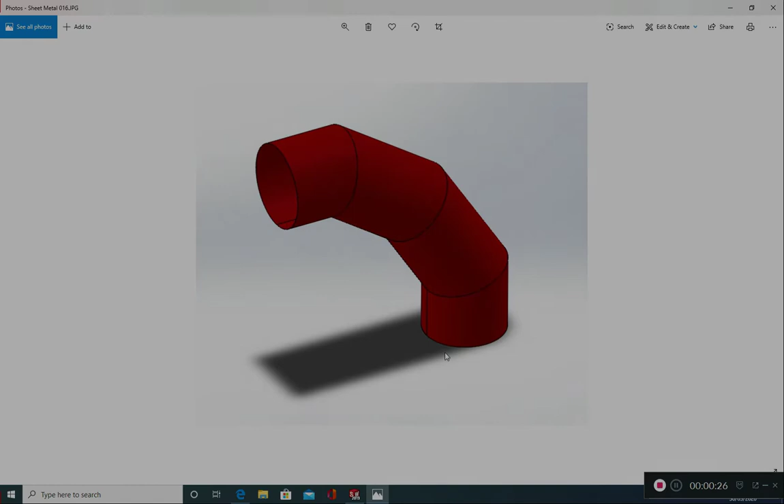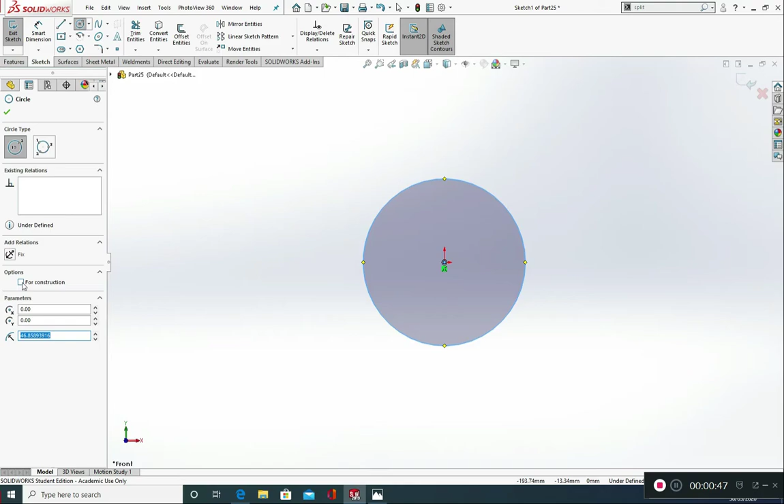So I've flipped into SolidWorks here. I'm going to go to File and New, and I'm going to create a new part. I'm going to go into my front plane, Normal To, and I'm going to produce a circular sketch from the origin point, and I want to make this for construction. I'm going to get a line now. I'm going to draw a line from my top quadrant to my origin, and then across to this quadrant over here. Press the Escape key.

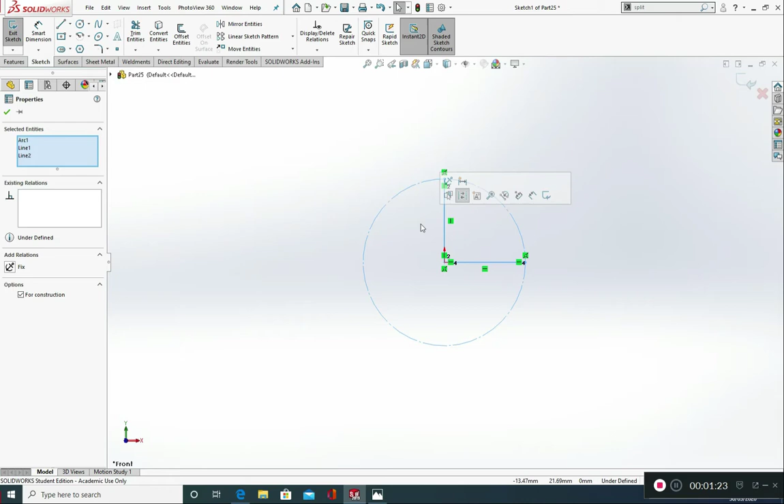Select both of these lines. You can hold down Control and left click on each. The other way of doing that is the two selection boxes. You've got a blue selection box and a green selection box. The blue selection box will select anything that is entirely inside it. The green selection box will select anything that is touching it. So I just want these two lines to be selected, so my green box can go like this.

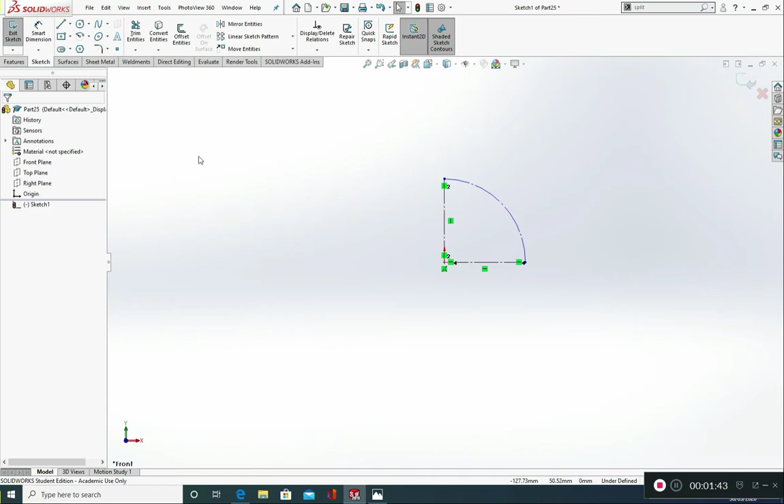I'm going to make these two lines for construction and green tick. I'm going to go to Trim Entities, Power Trim, and just trim that away. Green tick. I'm going to go to Smart Dimension and give this a value of 1000 millimeters, and this will also be 1000.

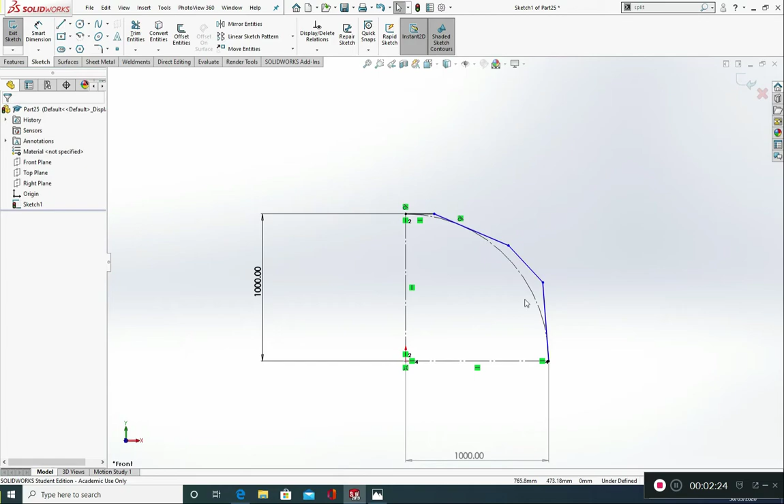I'm now going to go up to Line and I'm going to draw in my profile for my 4-part elbow bend. So this is going to be the path that the profile will take. So 1, 2, 3, 4. Okay, I want to make this line here vertical.

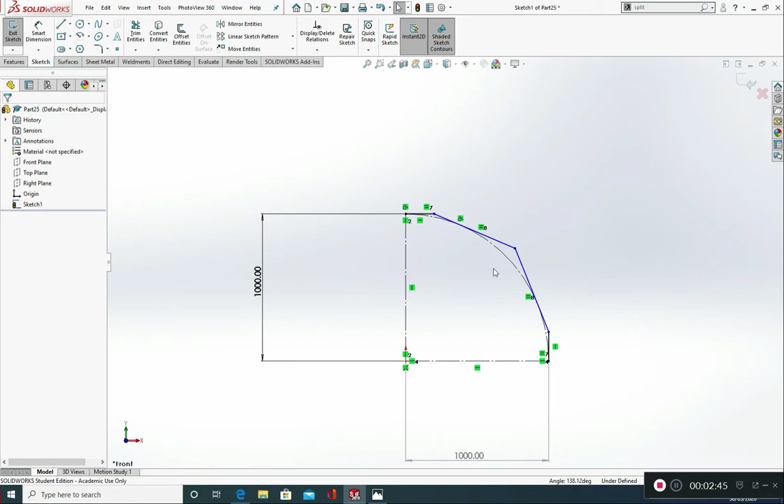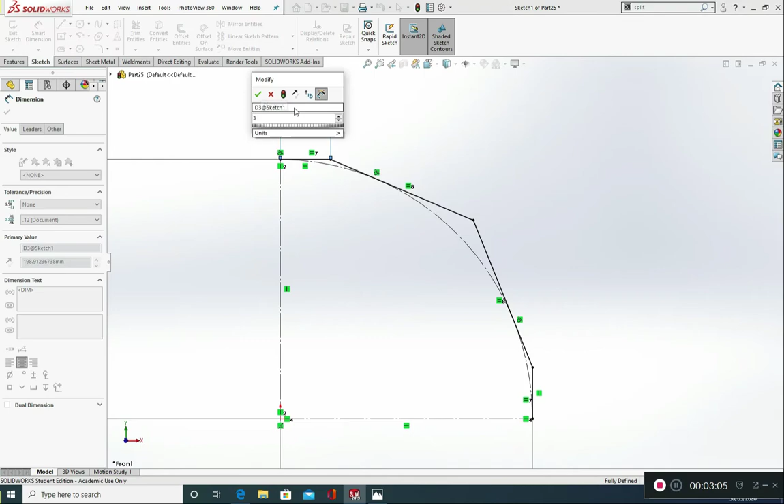I want to make this line, hold down Control, and this line, I want to make them equal. I want to make this line, hold down Control, and this line equal. And I want to make this arc and this line, I want them to have a relation of being tangent. Green tick. And the same for the other line. Hold down Control, tangent, and a green tick. I'm going to give this a smart dimension of 300, green tick, and I'm going to close the sketch.

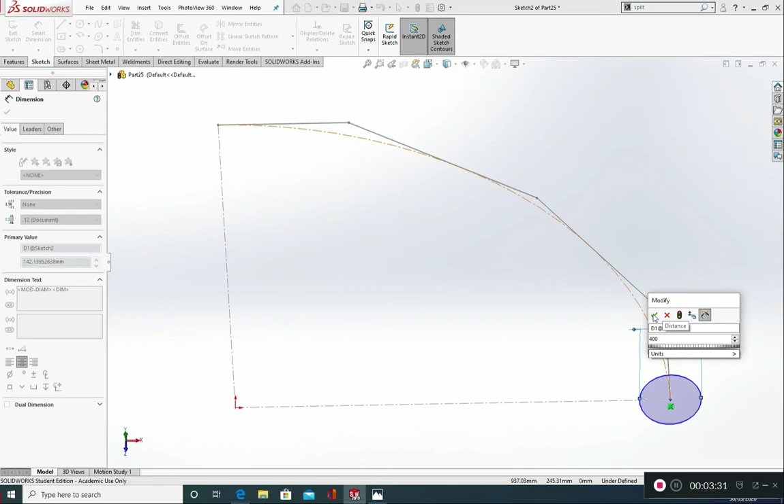I'm now going to go into a top plane and Normal To, and I'm going to produce a sketch of a circle down there. Give this a smart dimension of, let's go with 400. Okay. Once you've got that 400 millimeter circle in, close the dialog, close the sketch.

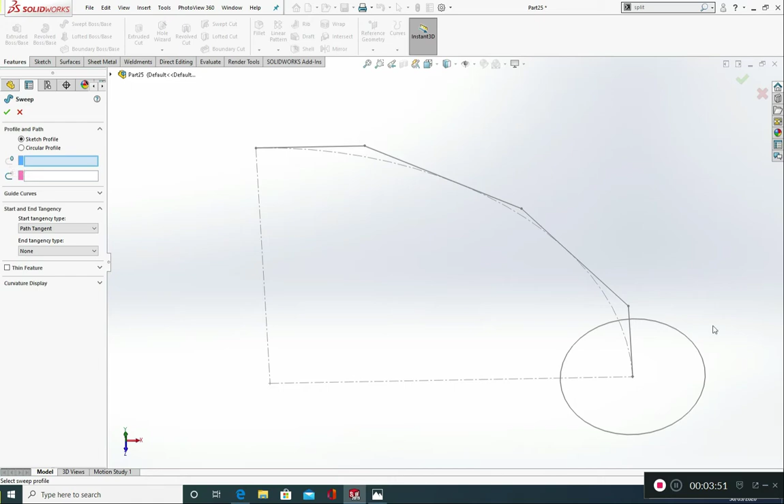Go into Features, go to Swept Boss/Base. This is the profile. Select the circle. This is the path. Select the path. Okay, we don't have to look at anything else within this particular area for the time being. We're happy with the standard settings, so green tick. Okay, so what we see here is our 4-part elbow bend. However, it's solid at the moment.

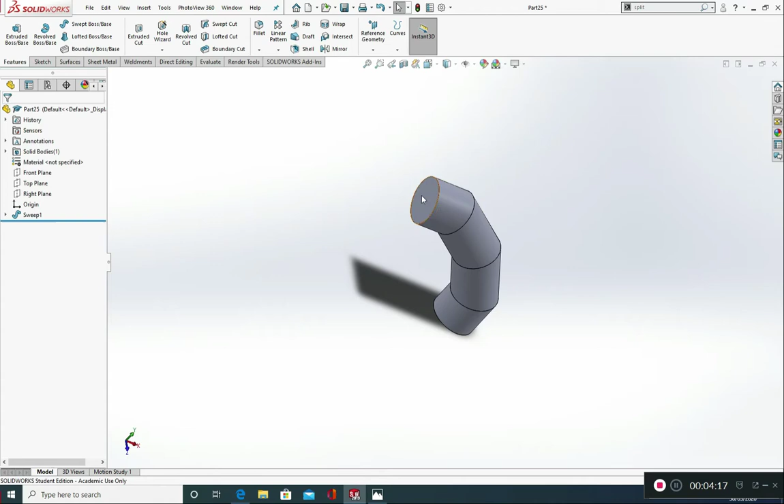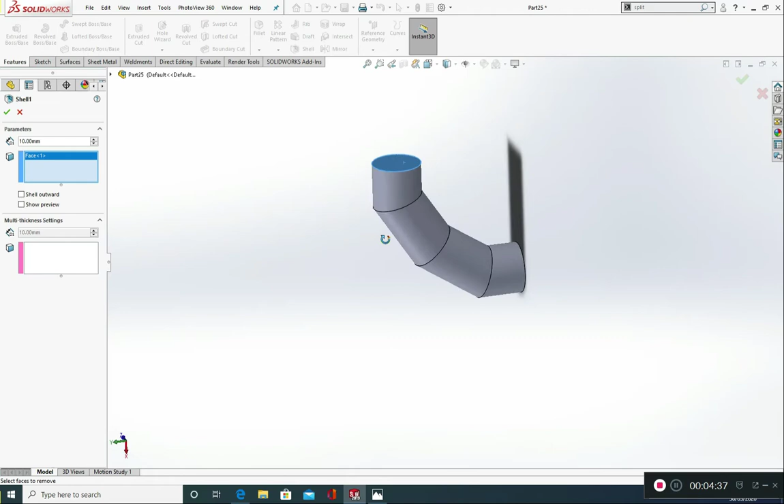We need to shell this out, and we do that by going into Features and clicking on Shell, and this will remove material from a solid body to create a thin walled feature. So we're going to left click on Shell. We're going to click on this face here, and we're going to give the wall thickness of this 3 millimeters. Okay, and green tick. Control 7 on your keyboard will do a nice isometric view.

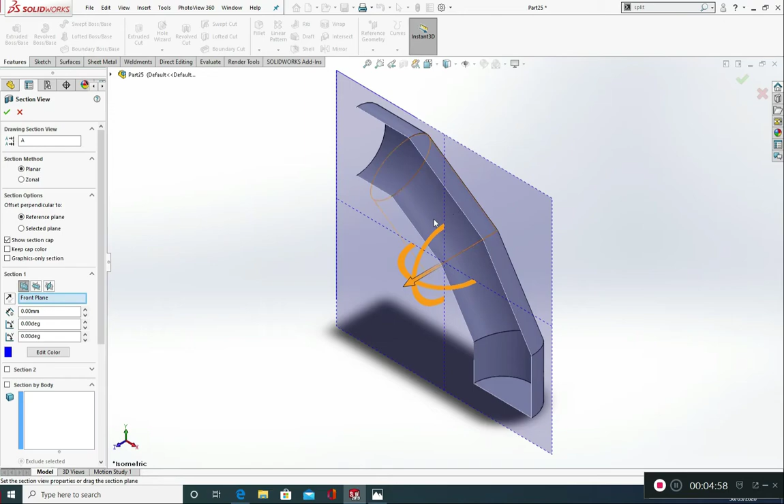And if you go up here to section view, you can see we can have a nice section through that. This is in the front plane. This is in the top plane. We can drag our arrow up and down. Okay, and this will be in the right plane, and we can do the same there as well. Okay, green tick, and if the section view is still showing, you can just turn it off by clicking again on here.

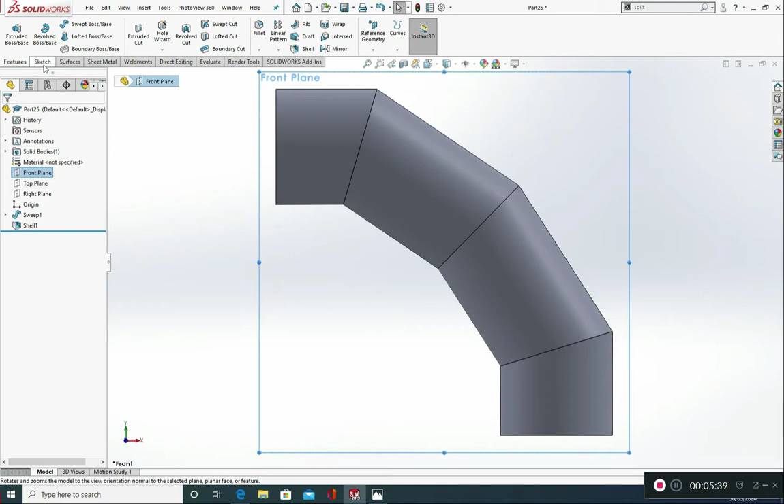The next thing that we need to do is to create a gap in this part where it will be rolled and then welded. We're going to do that at 1mm. So to do that, we're going to go into our front plane and Normal To. We're going to go to sketch, circle, and we're going to sketch from our origin to around here. Okay.

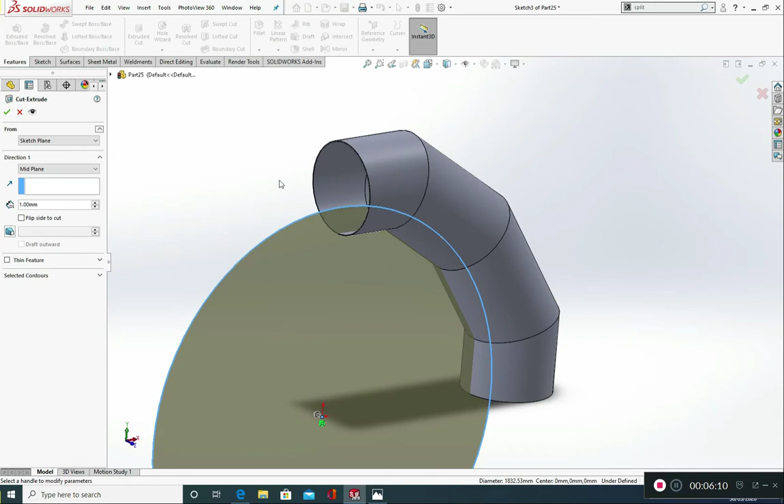And close the dialog. Now you'll see where that's been drawn. Okay, it's been drawn halfway through that circle. So we're going to go into features now, extruded cut, and we're going to go into mid plane, and we're going to type in here 1mm. Okay, so it's going to go either side by 0.5 and green tick.

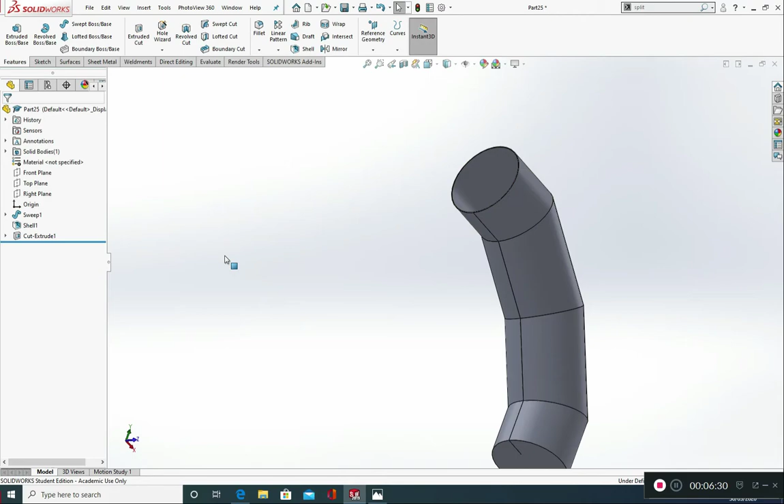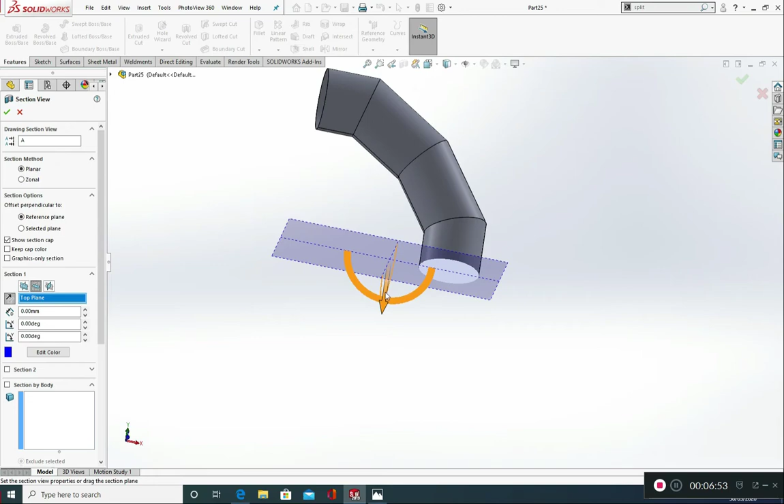So you can see now it's produced a cut, okay, all the way through at this part. Okay, so I've noticed here that it hasn't actually made it hollow all the way through. If we go into a section view, I'm just going to go into this top plane here. Just going to drag this up. I'm going to flip it round actually. And you can see, if I just confirm this, that we've still got a base here at the bottom.

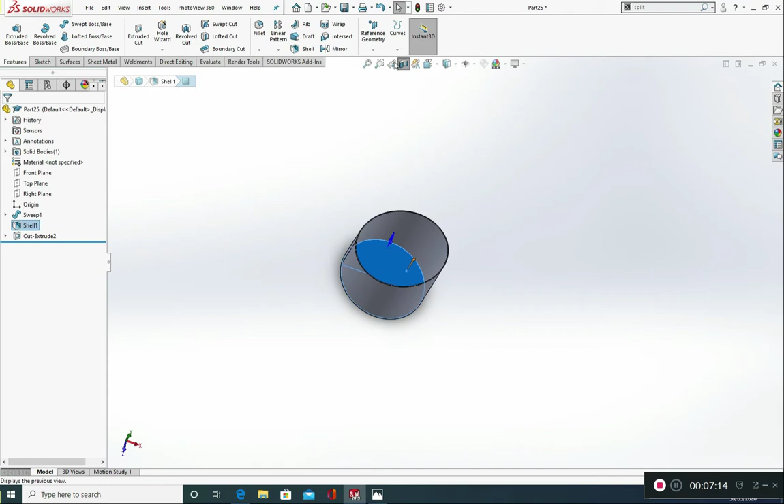Okay, the reason for that is because if we just come out of section view, go into shell and edit feature, we only clicked one face. We clicked face 1, we didn't click face 2. So go into face 2 here, click this, and just green tick it, and that will resolve that issue. Okay, right.

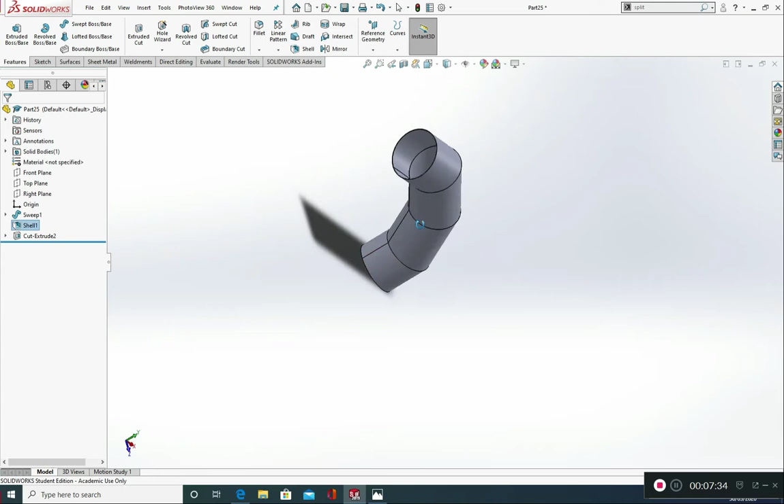Next step, we need to split this part up. So we can start to produce individual drawings that are flattened pieces of metal that are ready for machining, and we can convert these drawings into a DXF file and then send that out to a machine for cutting.

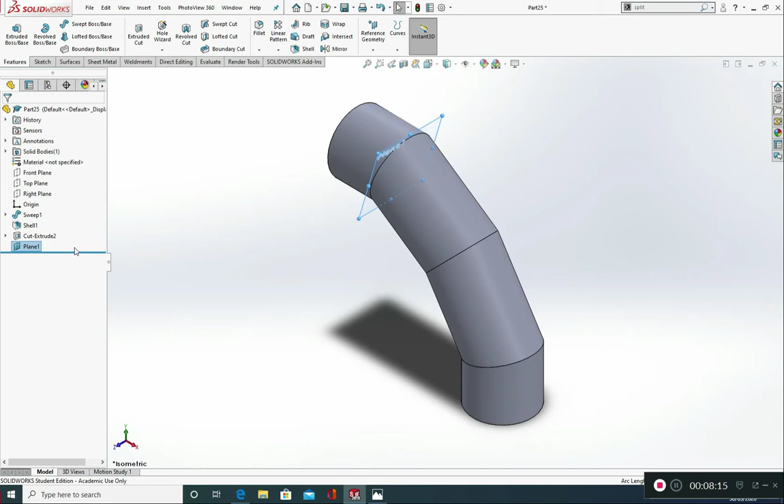So in order to do that, we need to go to reference geometry, which is in the features tab, and we're going to go to planes. We're just going to click on the edge of this circle, okay, and green tick. Press escape because we don't want to be still on plane 1. Go on to reference geometry, plane, click on the edge of this circle. It'll go like a deep orange colour once you're over the top of it, and left click.

And again, reference geometry, just make sure to press escape first. We don't want to be on plane 2. Reference geometry, plane, and green tick. Okay, we're going to rename these, so I'm going to right click on them and rename the tree feature to split 1, right click, split 2, and finally split 3.

The reason I've done that, I just like being organised for one, and another one, it's best practice really for you to keep these nice and neat on the left hand side in the features manager. Should you or somebody else come to use this particular model, everything's really organised and it's easy to find your way around the work.

So the next thing that we need to do is actually split this up so we can get the individual bodies of this elbow joint and send those out as DXF files. So we need a split command. Now there are two ways to do this. The first way is to go into direct editing, and you can go into split. If this isn't available, right click and look for direct editing here and just make sure you've got a tick at the side of it.

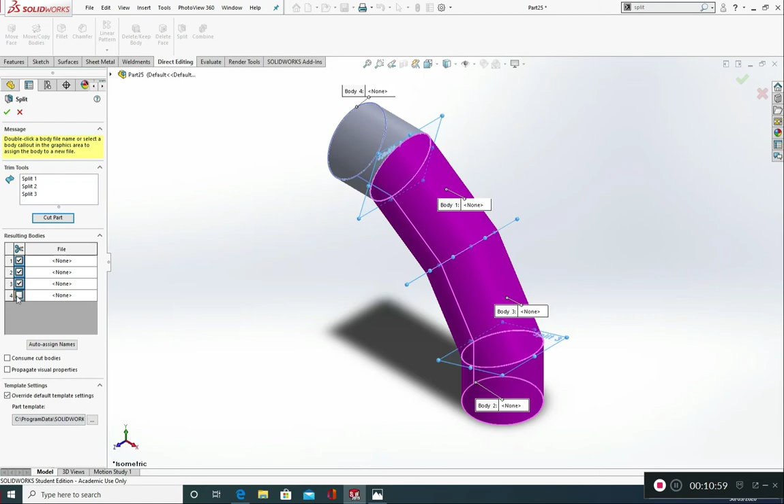Then we can find number 1, number 2, number 3 and number 4. Again, just ensure that consume cut bodies isn't ticked. If it is ticked, we'll end up losing some of our model. So these 4 highlighted and just green tick.

Perfect. So you can see now we've got our 4 bodies and they're listed over here under solid bodies: split 1, split 2, split 3 and split 4. Now to get a DXF from this, really simple, just right click on the split under the solid body and go to insert into new part. Just left click there. It's telling us now it's about to insert this into a new part.

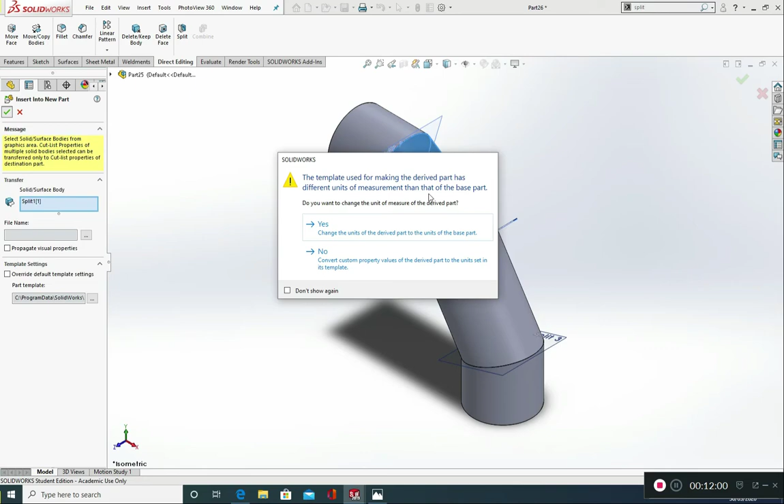We can give it a file name. It's giving us our template settings. I'm just going to green tick this. Now it will come up with a warning message on my SolidWorks telling me that the template used for making the derived part has different units of measurement. Do I want to change the units of measurement of the derived part? No, I don't. Okay, I can save this. I'm going to save it as sheet metal elbow part 1. I'm going to overwrite that file.

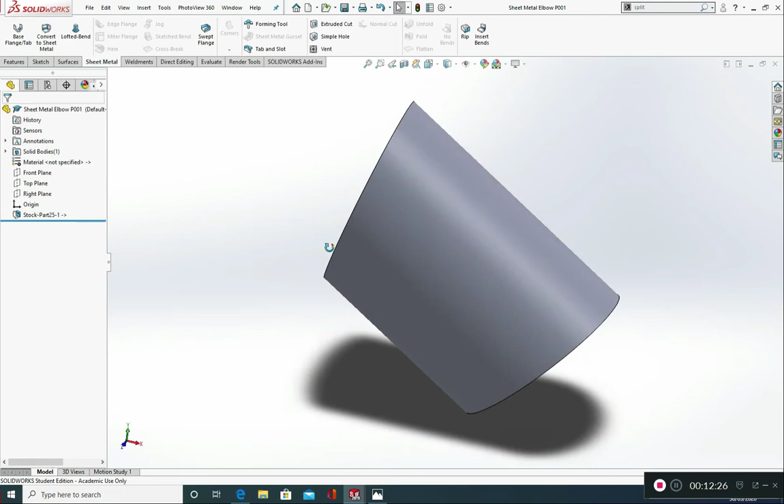And now I want to flatten it. So if I go to sheet metal, flatten isn't available. I can't click on flatten. That's because I need to insert bends. So the reason we put this cut in here, this 1mm cut, is to place this bend in it so it actually flattens the sheet of metal. It would be rolled like this in industry and it would be welded afterwards. However, in SolidWorks we need to click on this insert bends button prior to flattening it.

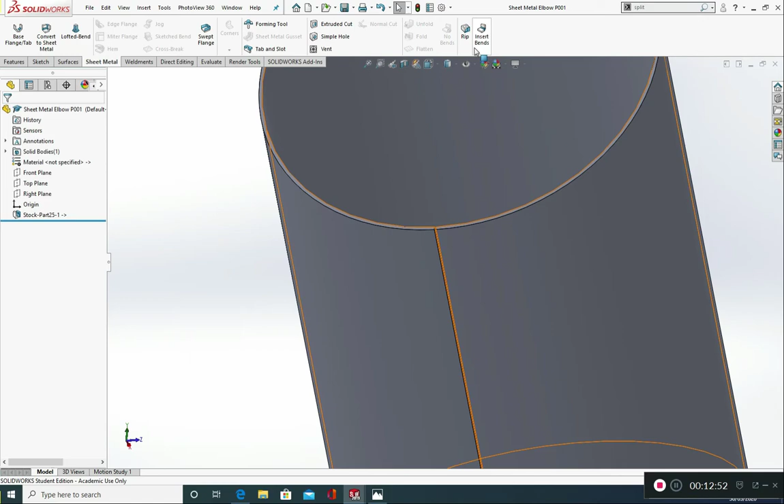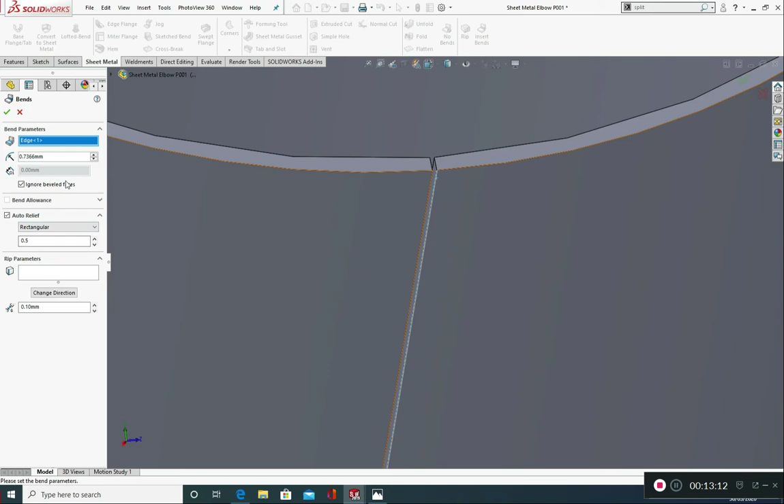So under sheet metal and insert bends, just click on the edge of one of these 2 lines, either this one or this one. Once you've selected it, you don't need to change any of the settings here. Your bend allowance should be at the K factor of 0.5 and just green tick. Nothing happens, but it has been turned into a piece of sheet metal and it is allowed to be flattened now. So if I click on flatten,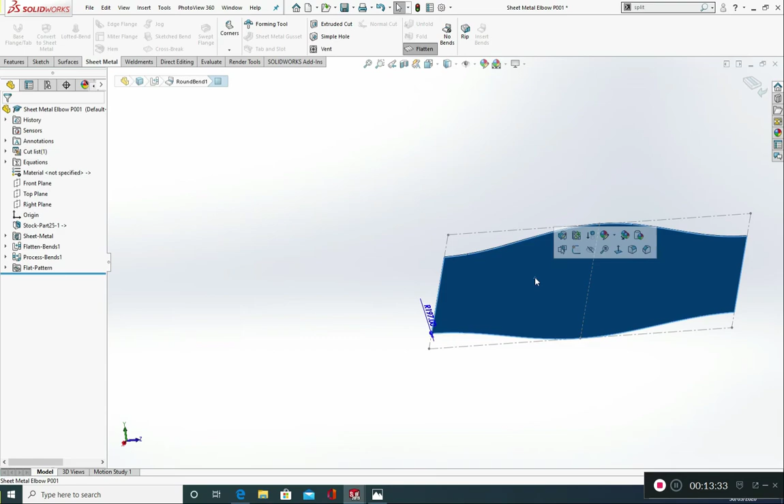and I go to this face here, click on it and do Control 8 on my keyboard, I'll get a normal to view. I can then go up to File, Save As, and I can save this as a DXF file. And save. I want to export as sheet metal and just the geometry. That's it. And green tick. And what we've got there is the actual piece of metal, how it would look like as a line drawing. We could send this DXF file out to a machine, and it would cut it accurately.

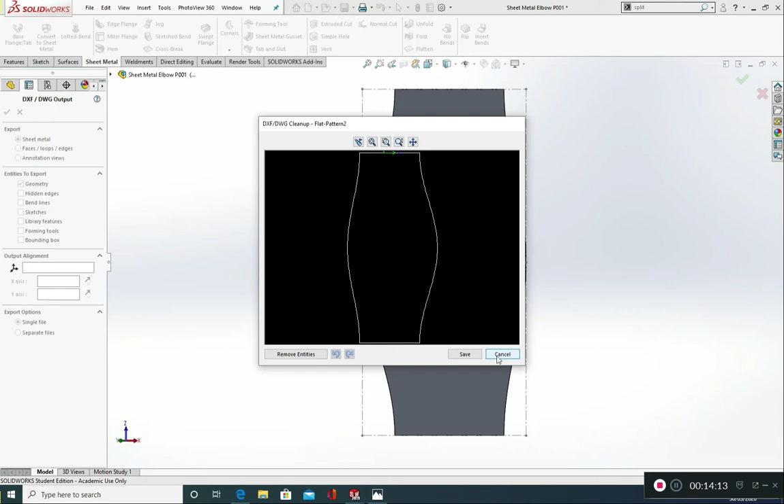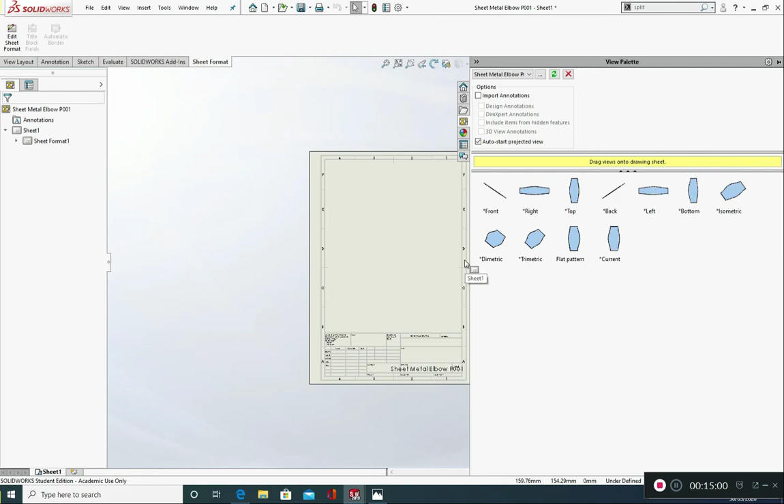What we do from here is you'd go back into your part, you pick up split 2, you'd right click, you'd say insert into new part, and you go through that same process in order to produce each one of those drawings. You could, if you wanted to, go into sheet metal elbow 1, you could say file, make drawing from part. Let's just do this on A4. Okay, and it's got a British standard A4 sheet of paper there.

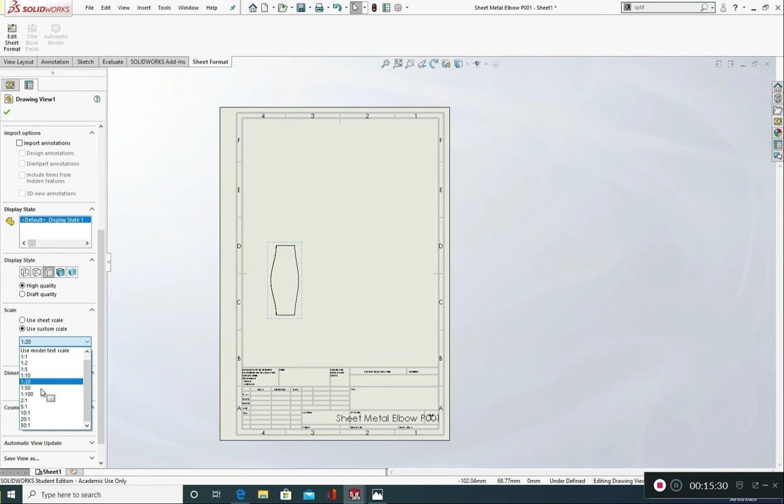And you could drop in a top view, and you could scale that up. So if you just click on this, you could change it to your scale here. So use custom scale. It's at 1 to 20 at the moment. You could have it at maybe 1 to 10 if it fits, and green tick. So you could have all these. You could have different views of it. You could have isometric views of it. You can also do that with the drawing itself as well.

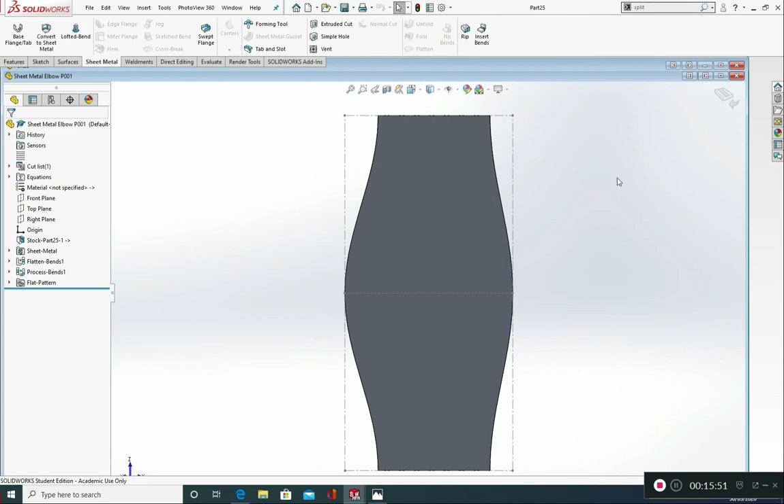So just close this down. Just going to save that. With this one, you could do exactly the same. So you could do file, make drawing from part. I'm going to save this as complete sheet metal elbow. Okay, and just save. Pick an A4 sheet, and the same principle applies here.

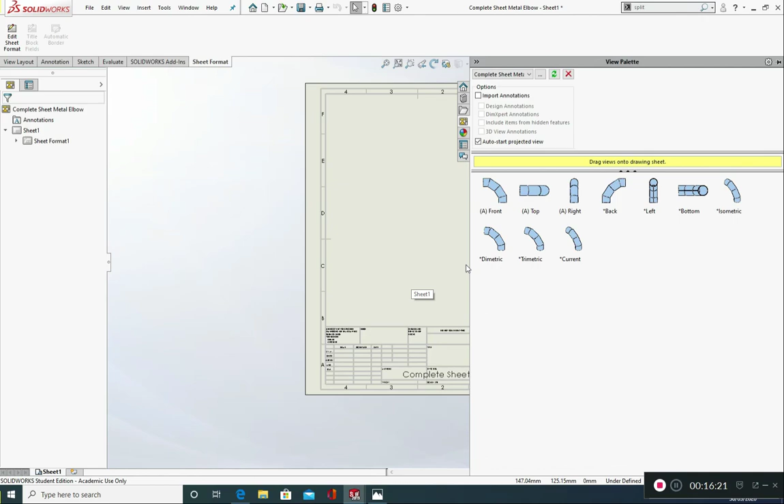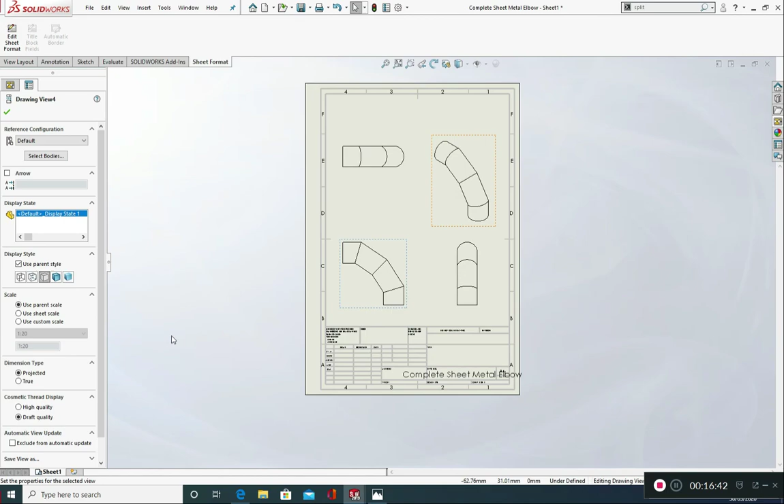I could get my front view, my top view, my side view, and my isometric, like so. And I can change the display of that just by clicking on that viewport and going to maybe shaded. Okay, so that concludes that video tutorial on how to produce an elbow bend, a 4-part elbow bend.